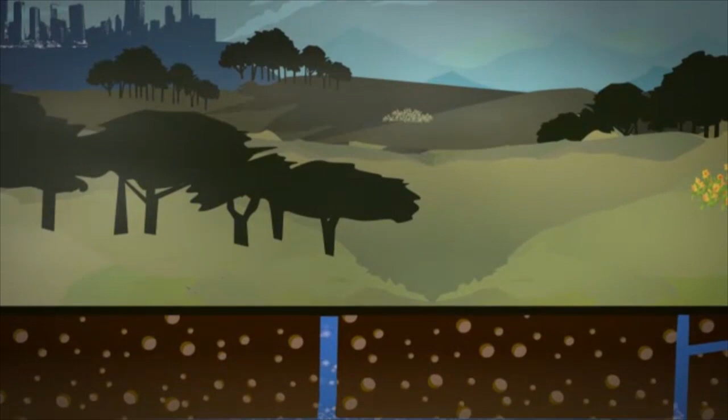Eliminates transportation costs from transfer stations to the current landfills, producing a very important saving to responsible administrations. Reuses 92% of municipal solid waste and turns it into a clean and reusable energy source. Enables lower consumption of natural resources.

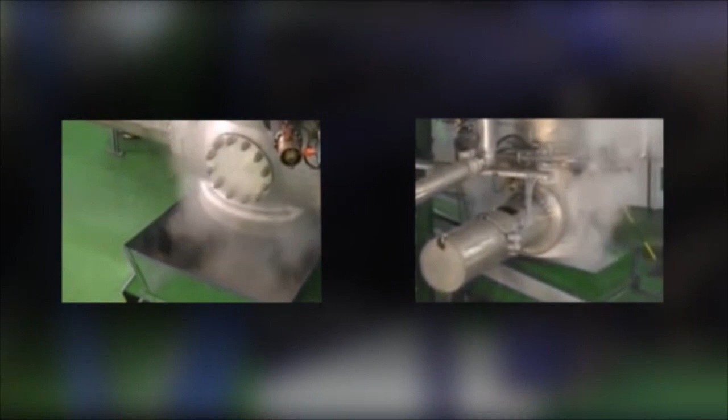Its functioning is totally organic and sustainable, as it only uses water vapor through the whole process and is self-sufficient in its energy consumption. Eliminates costs related to selective collection of municipal solid waste, as it is not necessary, producing a very important saving to the responsible administrations.

Promotes a hygienic working environment. Its modular character favors its installation in all kinds of areas and locations. How does this plant work? It is the installation of an industrial plant for the treatment of municipal solid wastes.

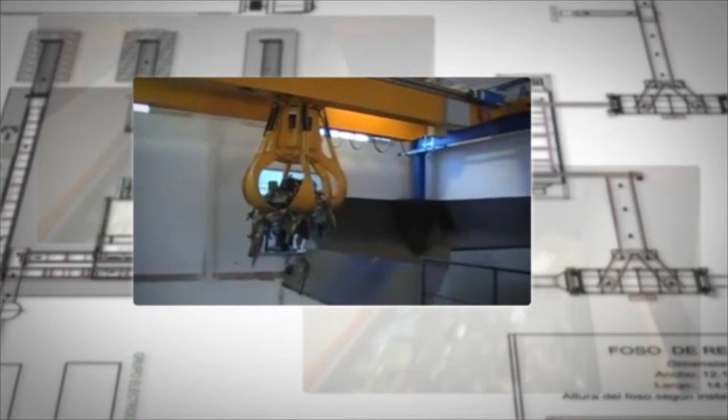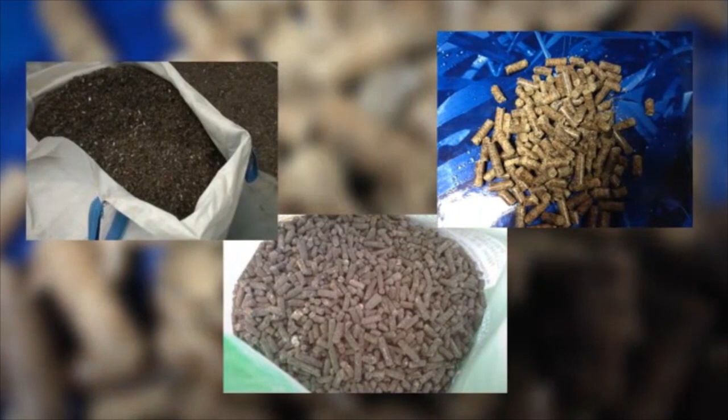By recycling them, it turns them into perfectly usable subproducts, saleable in the market, to get clean and reusable energy with them. These products are stabilized thermo-organic biomass shaped as pellets or gas, plastics that can become synthetic diesel, kerosene, mix oil, clean aluminum or serigraphies and paintings, ferric materials, inert and non-polluting materials such as sands, glass, cement, textiles, etc.

92% of recycled material can be used. The remaining 8% corresponds to clean, inert materials. This fosters the elimination of waste landfills as we currently conceive them, as landfills resulting from this process will be a small proportion, 8%, and only of inert materials that do not pollute.

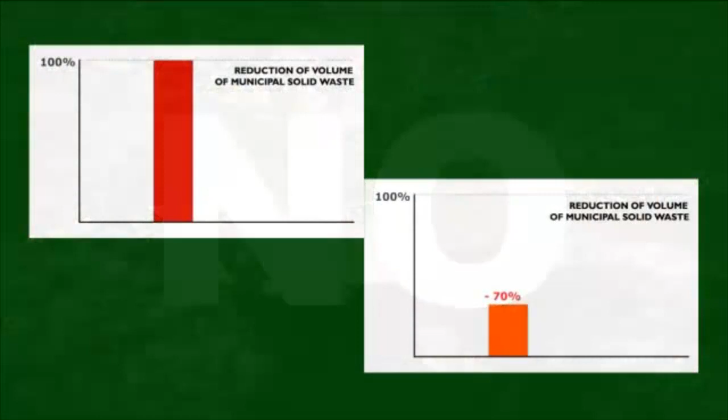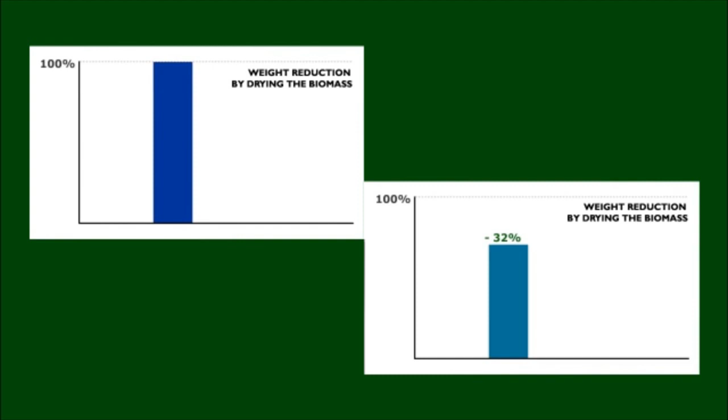Due to the sterilization treatment employed, a volume reduction of the municipal solid waste from 50% to 70% is obtained, and a weight reduction of 25% to 32% because of the biomass final drying. The process that takes place in the treatment and recycling plant starts with the trucks weighing in on the scale, which is installed in the facility's entry area.

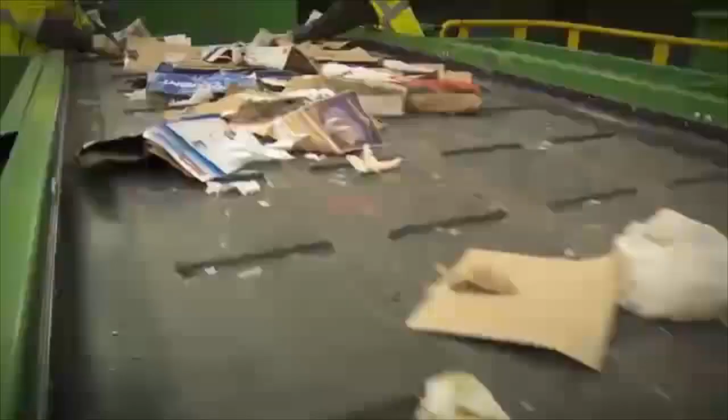Next, garbage is poured out into the reception ditch or set-up silos for its accumulation and later transportation to the waste disposal unit, and the complete crushing of all municipal solid waste is produced, with a maximum output size of 120 mm. Through a conveyor belt, all crushed materials are moved.

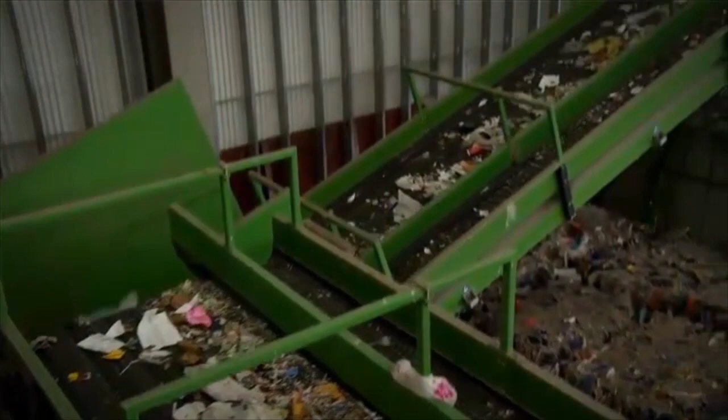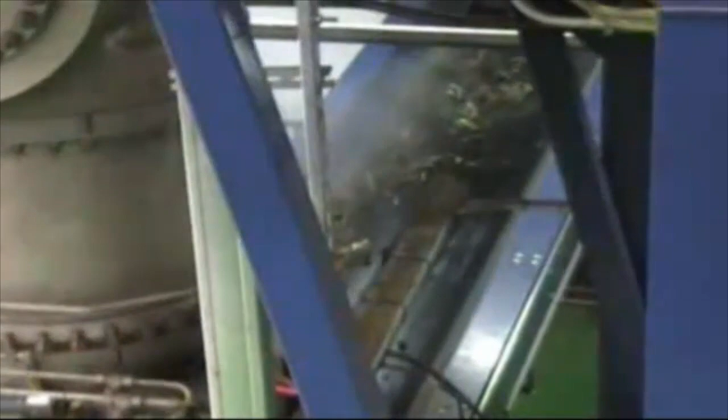Prior selection of ferrous materials by a magnetic separator and sterilization treatment of all municipal solid waste is done continuously, avoiding opening the autoclave doors and the consequent loss of energy and water vapor in the whole process. Then, the unloading and dispatch through conveyor belts of all sterilized material to the biomass separation trommel takes place. Plastics, aluminum, ferric rests, and inert material.

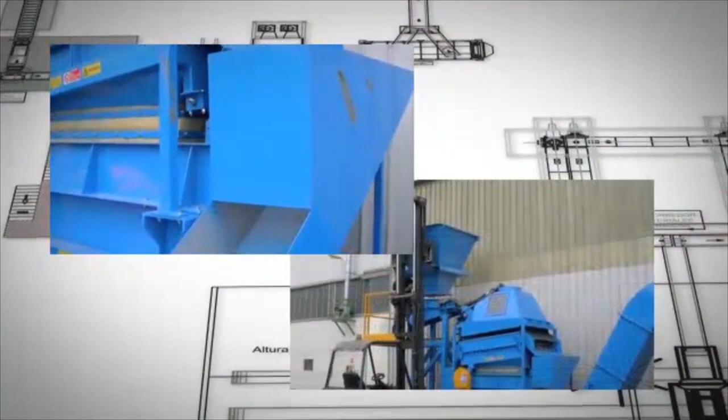After this, the selection and more selective separation process begins through the use of the following equipment: densimetric tables, optical separator through material scanning, magnetic separators, metal separators by Foucault currents, plastic separator by density.

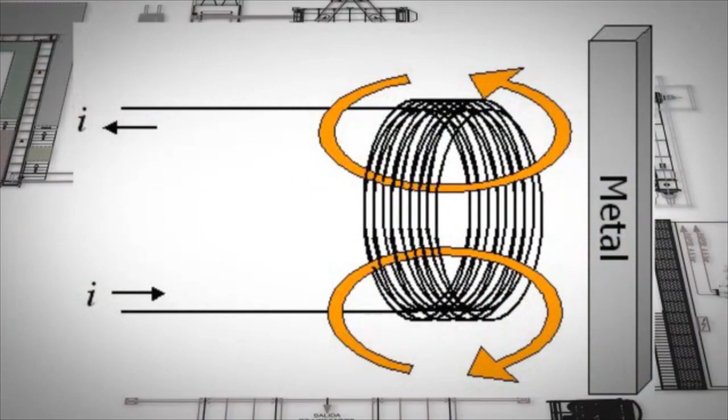Next, the selection and drying process of the organic thermostabilized biomass is done for its further transformation into pellets ready for use as fuel in cement works, thermal power plants, electric power plants, etc., replacing coal or petroleum coke, which are fossil fuels and much more polluting. And finally, the pyrolysis process of selected plastics for their conversion into synthetic diesel, kerosene, mix oil, etc. occurs, depending on the temperature at which the process is held.

In summary, the most significant ecological benefits of using this process are the total elimination of organic material landfills, with everything that this represents, and the conversion of approximately 92% of all municipal solid waste into reusable and recoverable materials.